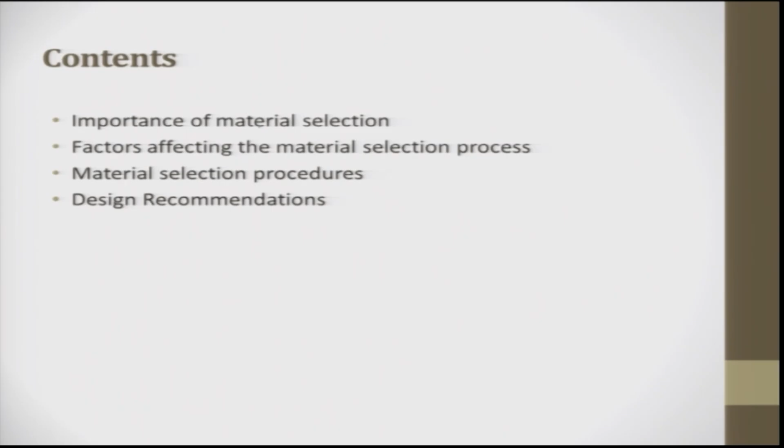So, in this lecture we will have the following content. The first one is the importance of material selection, which is very important because it is directly proportional to your cost and performance. So, importance of material selection, then factors affecting the material selection process, material selection procedure, and then design recommendations. These are the four topics we will try to cover in our lecture.

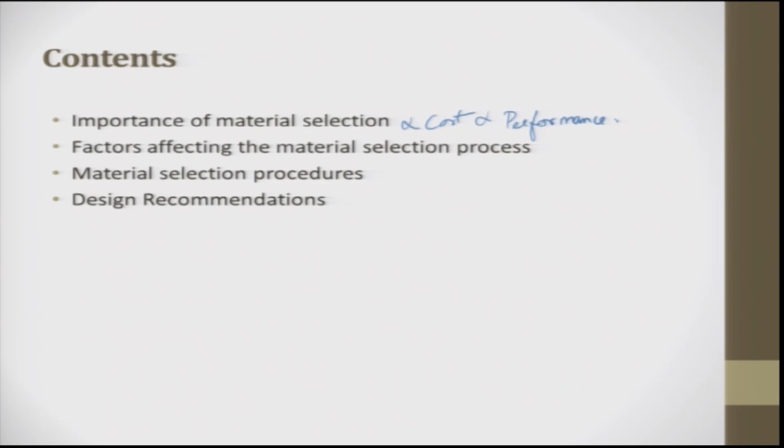So, importance of material selection: for the successful functioning and feasible low cost manufacturing of any product, the choice of material is important. A simple example is your chair. Initially these chairs were made out of wood, then steel, and today they are all made out of plastics. Initially the customer could not digest how they could sit on a plastic chair, but the product designers presented the chair in such a nice fashion, they brought a lot of comfort into the chair, plus they tried to have maximum strength integrated into the chair. The design of the chair was wonderful.

So, slowly over a period of time plastic chairs have been accepted by people, and today plastic chairs are the most common thing you find in any living room or dining hall in any house. So, it is the material which changed its properties from a soft material to a very hard material, and a design integrated into the material made it a robust structure for people to sit on.

It is widely accepted that the final cost of the manufactured product is largely determined at the design stage. So, this point clearly states that the product designer has to have an idea, or has to have a team member who is a material expert in his team, to make a proper choice of material. And manufacturing: you make a wonderful product, but if it cannot be manufactured, then the product fails miserably. So, it is always good to have a materials expert in the design stage itself and keep manufacturing in mind so that you make your final cost less.

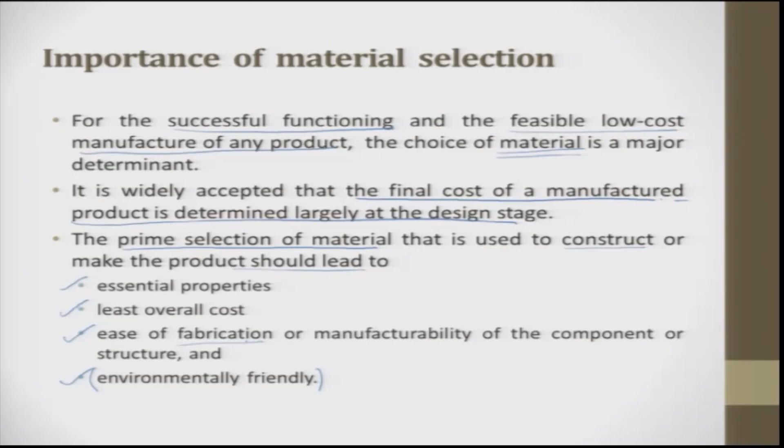For example, plastic parts are very economical because it is a one shot process. So, the fabrication is very easy, whereas with steel, multiple steps have to be done to manufacture and make a product. So, this is what ease of fabrication is. These are the prime selection criteria for material we have. So, when we talk about the importance of material selection, shape and size are very important.

Shape goes to form, then there is a link between function, and then there is a link from the shape to the process, shape and size to the process. You change the dimensions; if you go larger and larger in your dimensions, the process involved in making those large dimension products is going to be different. So, process, and then here are materials.

So, for the function you have to do a material selection, which is here, and this in turn is linked to the properties: material attributes, process profiles and environmental profile. So, where are you going to use it, what is the process to be done, what are the material attributes, which is going to make the product very successful. So, with material selection, they look at these properties and they are linked with the process. This happens back and forth: the functioning, processes, shape and size, all these things go back and forth to get a good product.

So, the requirements and constraints come from the customers. You will have technical, commercial and government constraints, and then this will lead to clarification of need, conceptual design, embodiment design, detailed design and manufacturing design. They in turn are linked with the material selection or material attributes. So, this one is again a back and forth motion. These are the typical steps involved in designing.

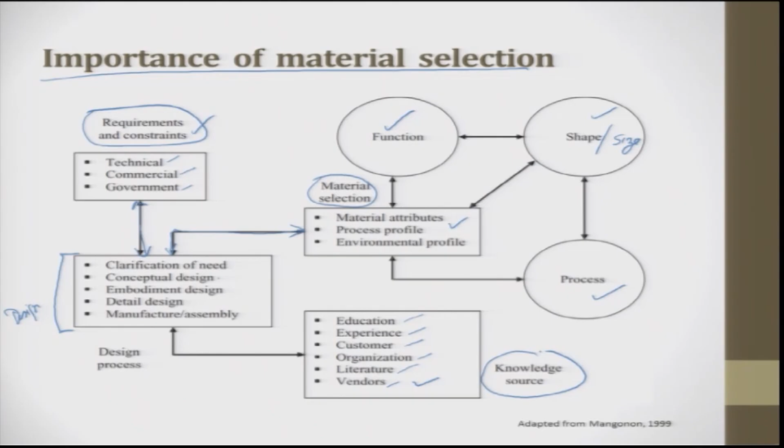So, if you look at the knowledge source, where do they get it from? Education, experience, customer, organization, literature and vendor. So, it is nothing but the voice of the customer which we discussed in the QFD. So, this entire schematic diagram integrates function, shape, size, process, knowledge and the constraints with the material selection. All these things put together are very important when you try to choose a material.

So, the factors affecting the material selection process: one is physical form, size, weight, shape. Today, we expect a product to be as light as possible, and we also look at a product which has more comfort, that means more customized. The shape has to be very smooth and sleek. They are looking at shapes which are very elegant, weight as light as possible, and size as small as possible. For example, cell phones: the sizes have gone down. The first cordless phone which came into the market weighed around 1.5 kilos. Today, we talk about a cell phone of 100 grams or less.

Then the mechanical factor is the other thing, where we talk about strength, modulus and fatigue. Strength is talked about in the plastic region, modulus is talked about in the elastic region, and fatigue is nothing but cyclic loading on the product which it has to withstand for a longer time. For example, a chair: when a person sits, it is an impact load, and then he gets up and once again he sits or slides, so it is cyclically getting loaded. When one person gets up and the other person sits, another load comes in. It is a compressive load, so it is fatigue. So, here are size factors, and these are mechanical factors.

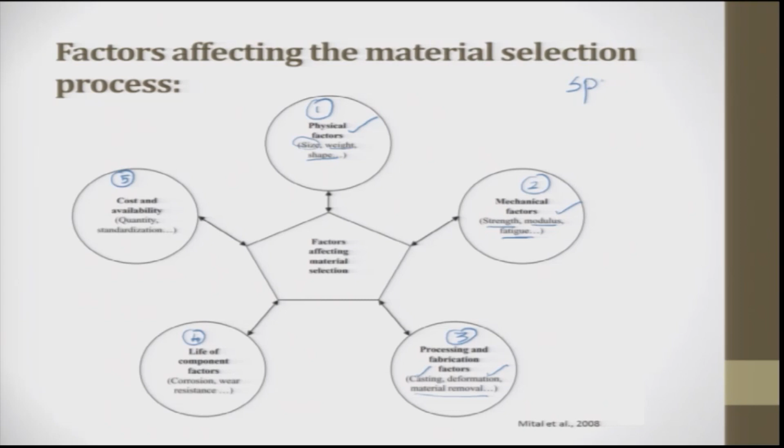I would like to develop a spoon which is used in party, and my customers are from the age of 5 years to 70 years. So, this is what I decide. So, I want to make a spoon, and the cost what I give is going to be per spoon. I am going to give rupees 2 per spoon, and I would also try to have the spoon which looks very close to that of a metal spoon.

Naturally, by looking at the cost, you can quickly say that it cannot be a metal spoon. So, I have to look for alternatives in ceramic spoons, or I can look for wooden spoons, or I can look for polymer spoons. So, then this is what I can come. So, first what I do is I try to take polymer, I try to take wood, or I try to take ceramic. But what is the problem with ceramic? Ceramic is always brittle. So, I try to remove this option also. So, I am left with only 2 options. With these 2 options I will start working.

So, first I would look at what should be this polymer material or wood material, what is the maximum size I can make, what is the intricate shapes I can make in the spoon, and what is the maximum weight we can give for that spoon. And I have said it is 2 rupees, and this spoon has to be also long lasting. So, if it is to be long lasting, then you can remove wood, but if it is decided to have a use and throw spoon, both these materials can be considered next. So, from here I move to the next one. So, I have chosen these physical factors, size, shape and weight. I choose these 2 materials, go ahead.

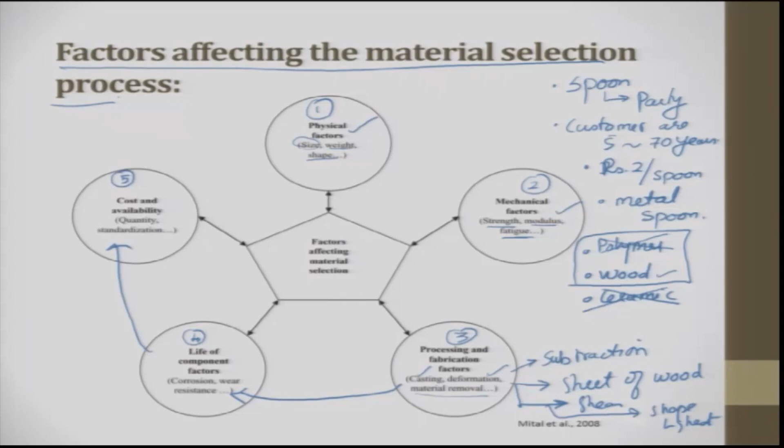So, these factors which affect the material selection process, all the 5 factors are very, very important. They are all linked to the material selection. So, the physical factors, as I discussed earlier, are size, shape, and weight of the material needed. The space availability for the component is also very important.

So, when I talked about the example of a spoon, a spoon is a single part which is a product, but many a times in reality you will have several parts put together forming a sub-assembly, and several sub-assemblies put together form a main assembly. Okay. So, the space available for the component is also very important,

because you might increase, for example, if you choose a material with lower density. So, here the volume is dictated, not the weight. For example, cotton wool, the volume is dictated, not the weight. Okay. So, you should understand the space. When you choose the material, you should choose it in such a way that it fits in the space which is available.

The strength, ductility, modulus, fatigue strength, and creep are some of the mechanical properties that influence what material needs to be used. Many a times it will be pretty interesting to see, all of a sudden your flower pot which was hanging fails. It has failed because of the creep behavior. Polymer does not have very good creep resistance. That is why people suggest, whenever you hang a flower pot, please hang it using a steel rod or steel wire.

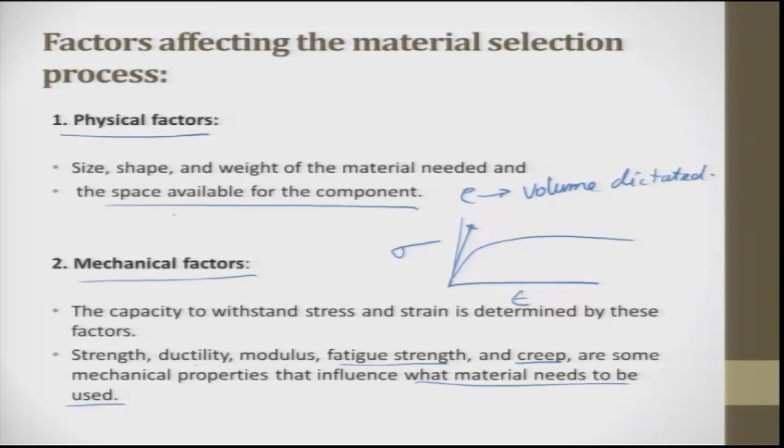Next is processing, which we have discussed enough. If you want to produce any part very economically, we look for polymer, and a process called injection molding. In injection molding, the cycle time is enormously less; in around 45 seconds you get 10 spoons made. Whereas with metals, if you want to do it at a very economical price, we always go for metal forming.

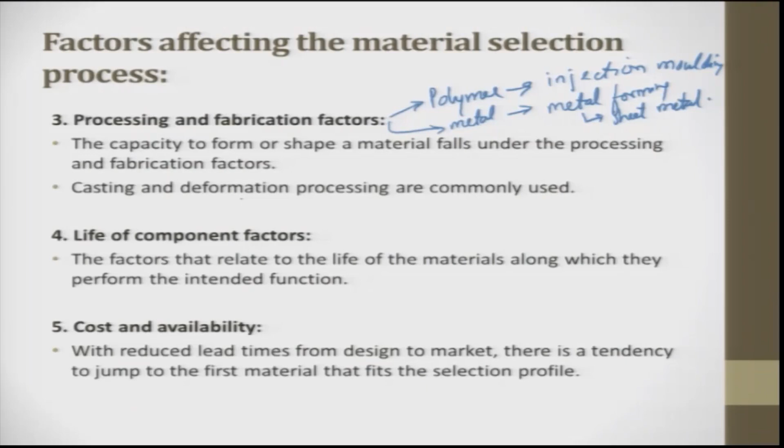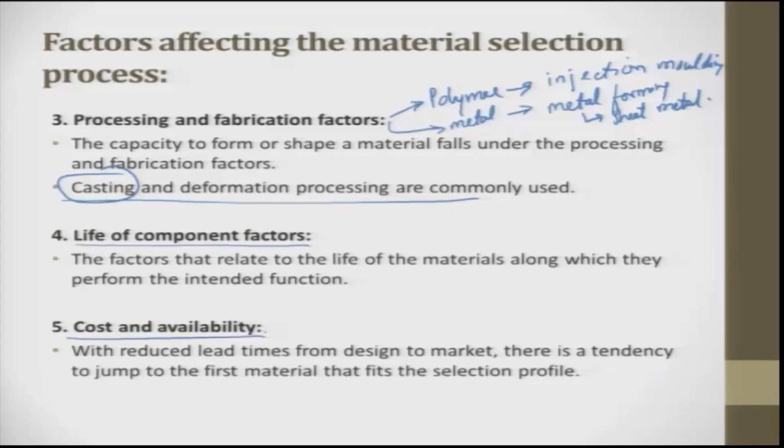That means sheet metal pieces are used, so that it can start making it. Casting and deformation processes are constant volume processes, wherein the starting material and the sum of the end products will be almost the same. This process is not thought of for mass production where the product cost is economical. The life of the component plays an important factor, and the cost and availability also play a very, very important role in choosing the material.

Like in biology, botany and zoology, we have a taxonomy followed. So, here in material selection also we follow a taxonomy, in which we talk about family, class, subclass and members. Okay. So, a range of materials can be subdivided into families. Families further will be divided into classes. Classes will be further divided into subclasses, and subclasses will be divided into members. So, why is it done?

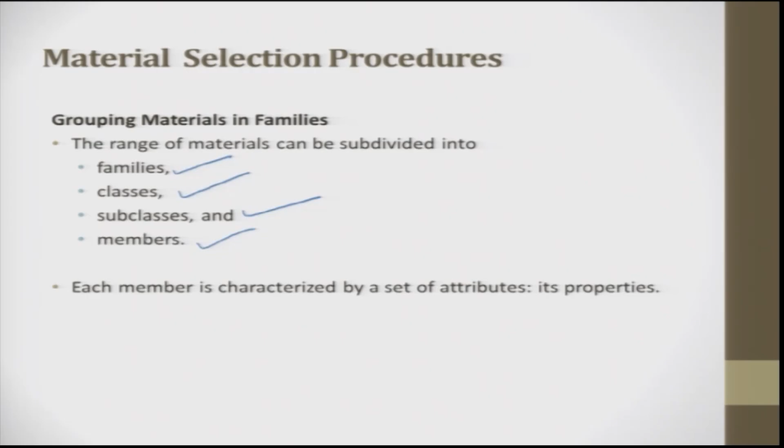Suppose you are able to identify the customer need and you are looking for a material for your product. Then by looking at this, you can quickly find out which material suits you. Each member is characterized by a set of attributes, its properties. So, look at it, here you have families which are ceramic, glass, metal, polymer, elastomer and composite. These are all families attached to a kingdom called material.

When I choose a metal, it is basically ferrous and non-ferrous. So, it is steel and all the non-ferrous: copper alloy, aluminum alloy, titanium alloy, nickel alloy and zinc alloy. All these materials have strength lower than steel, and their density is also less as compared to that of steel. If you are looking for a primary application, that means weight taking, primary structure, load bearing, then it is better to have a steel one.

Suppose you are looking at a secondary structure, not load bearing, but it needs to have a lot of heat conduction, then we go for copper. If it is going to be a secondary structure which has to be light and no heat taking, you can think of aluminum. All the space vehicles try to use titanium alloys and nickel alloys because they are light in weight, they have very high strength properties, and in combination with several alloys they show different performance when you put them in vacuum or at very low temperatures.

So, this falls in the class. First is kingdom, then the metal family, and then from the family we fall into classes. This steel is again subclassified into T300, T400, 600, whatever it is, TS 10,000, TS 20,000, 30,000, 40,000. These nomenclatures basically talk about the carbon which is present in the steel and also some properties. So, this is a class, this is a subclass.

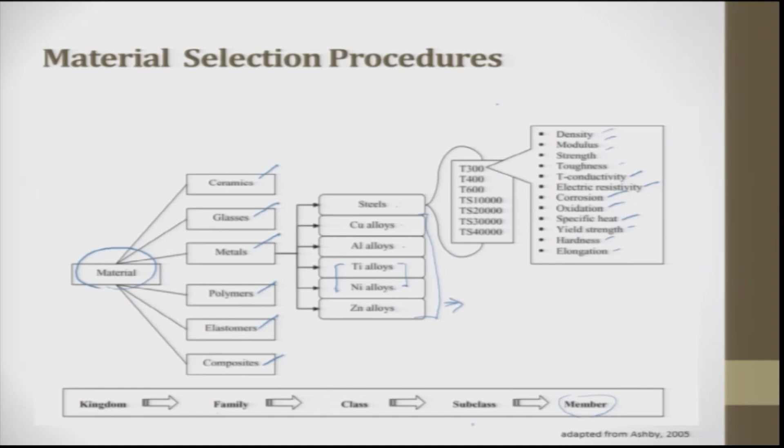So, grouping of material based on process capability. Earlier we grouped it according to only mechanical properties and physical properties, but this has nothing to do with process capability or processing. So, here we group the material based upon the process capability. Usually screening, ranking and cost optimization processes are used to arrive at the best combination of material. Screening and ranking eliminate the candidates that cannot do the job because one or more of the attributes lie outside the limits imposed by the designer.